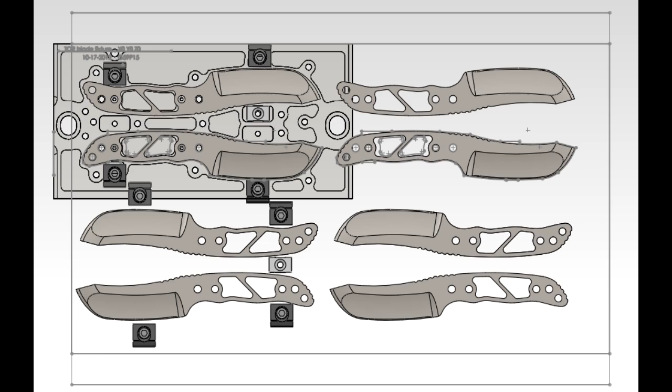The next probably week or two, I'm working on our fixed blade knife called the Tor. I'm making about 20 of these, the handles are already finished, I'm working on the blades next. I'm designing a big fixture right now so that I can make 8 blades at a time in one setup, that just makes the machine time go a lot more efficiently. But I've already shown how I made the Tor in several videos, so I'm not going to bore you guys with too many continuation videos of just doing the same thing over and over again.

Same thing goes for the Norseman, my folding knife. I'm getting ready to do a batch of 50 of these coming up soon, and directly after I finish with the Tor, it's going to be all about the Norseman. For that batch, I'll film some of it, but I'm not going to film everything like I was doing before, because I feel like it'll be repeating what I've shown in previous videos, and I don't want to do that. I want to show you guys new stuff, what I'm working on that's weird and exciting and interesting, not just the same thing over and over again. It gets a little boring.

With the Norseman, I have quite a few redesigns that I want to do. There's a bunch of little things - it's going to look the same, but it's going to work even better. All you guys who own one know how important those words are, because the first batch was good, the second batch was amazing, the third batch is going to be nuts. I've got a few little changes to tweak and redesign. I want to create my own bearing system, very similar to what I use now with the blue caged bearings, except I'm going to machine the plastic carrier myself, which will let me use smaller diameter ball bearings. That particular size isn't available right now.

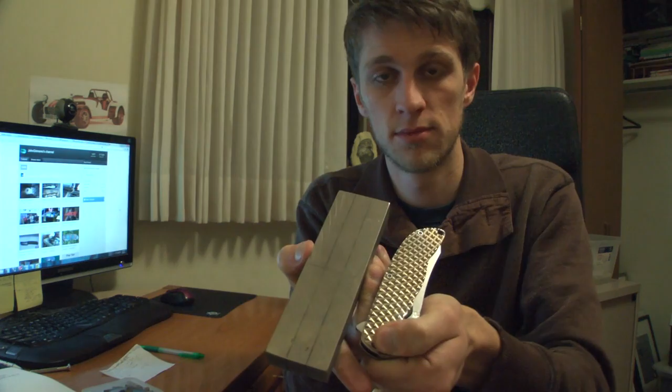Imagine making this knife out of a solid piece, where you mill out a contour where the blade goes. Now, what a lot of people do when they make an integral - and I mean, not a lot of people make an integral, but this is what people do anyway.

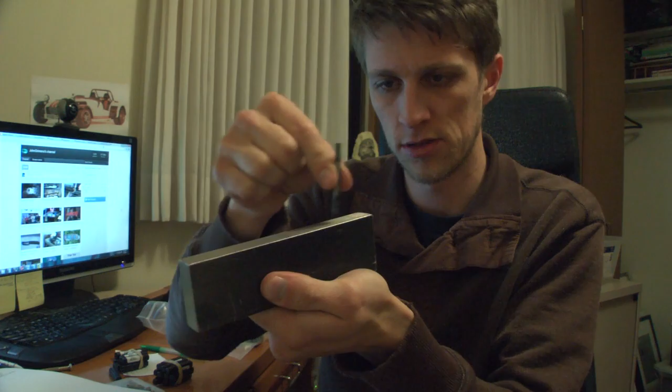The people that are foolish enough to take on this task, if this is the handle, they'll mount it upright in a vise like this. So they'll take an end mill like this. This is a 5/32 end mill. They might use something slightly smaller than this. Mount it up like this and just do passes down, down, down, down, down.

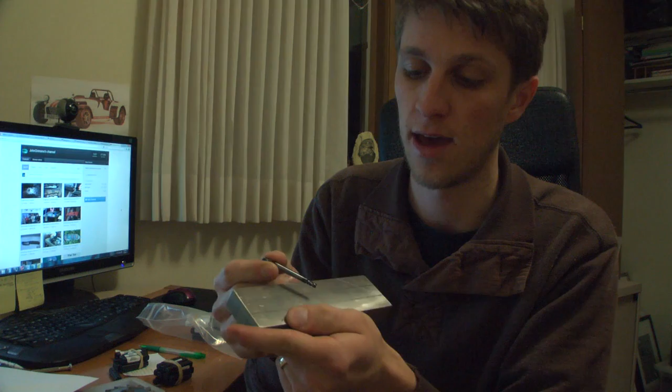But you got to think, you've got a blade that's almost an inch tall, so you have to mill down an inch deep using such a small diameter end mill. That's a lot of deflection, a lot of depth for this end mill, for it to go down that far. That's a lot of work for this little end mill, and a lot of guys have problems with that. When the end mill's sticking out this far, it deflects a lot, it chatters, and it just generally sucks, and it takes forever. My buddy Brad Southard says he spends 8 hours doing this manually on his manual milling machine. That's devotion for you right there.

So the better way to do it, the quicker, more efficient way, is to use what's called a slitting saw. Now this bad boy I had custom made for me by LakeshoreCarbide.com. It's a 3-inch diameter cutting wheel, slitting saw. The inserts, carbide inserts, are 5/32 inch wide, and it does both end cutting and side cutting.

So instead of mounting the block like this, I'll mount it like this in vice jaws or something similar, and then I'll go in from the side with this tool, and I'll create a trough, basically a slot. And I'll do it in multiple passes, but it'll go much quicker and much more efficient. If I had a big, fancy, expensive, rigid machine, I could do it in one pass. And I know a guy that does that on a big, fancy, expensive machine, and he says it takes 14 seconds. Boom. Versus Brad's 8 hours to do it manually. Now, I'd be happy if it took 10 minutes of doing light passes. I don't care.

Yeah, this thing's going to be really, really cool. Lakeshore sells these in standard sizes, but not in the 5/32 width that I requested, so he was kind enough to make that for me, and the price was reasonable.

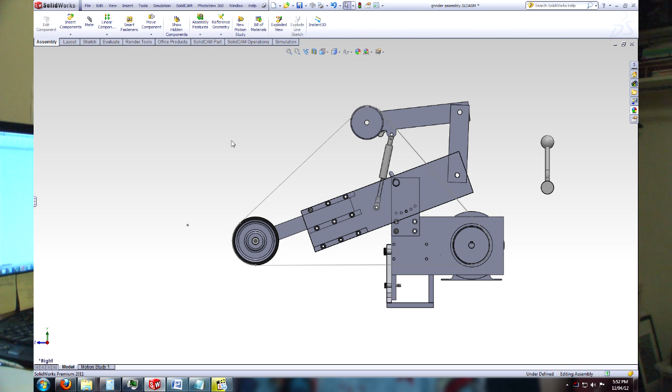So over the past week or so, I've been designing my own grinder. So here it is. It's basically a mesh between Brian Fellhoelter's Uber grinder and Mick Strider's Sofa King grinder, whatever he calls it, and a bunch of other pictures that I found online.

And it uses the 1 horsepower motor that I currently have for my disc sander, because I think once we have this, I won't use my disc sander very much, or I can always figure out a way to rig up the disc onto this apparatus.

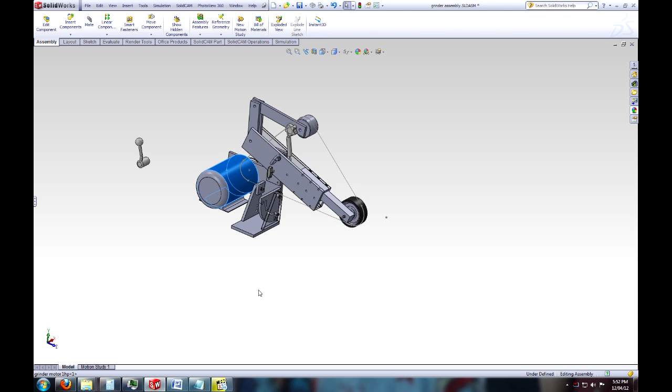But yeah, so it's something I'm really, really excited to build. I've been wanting to build one for a long time. And I just ordered all the wheels and pulleys and abrasive belts that I need from USA Knife Maker. This design is really cool. It's got a tilt bracket here, so you can go from a horizontal to a vertical grinder in one easy step. I got that idea from Brian Fellhoelter.

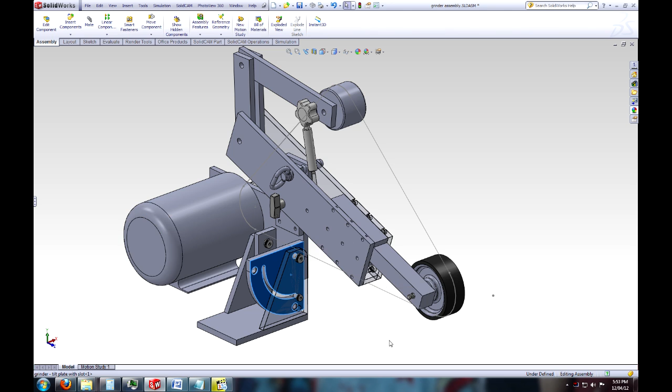Everything else is pretty basic. This goes in and out to adjust tension. It's got a gas spring here to adjust the belt tension up and down. This whole thing articulates, so you can adjust it, and it's got an adjustable work height.

All these pins here - you pull out this pin, and the whole thing can tilt up or down, depending on if I mount it on a table or if I want to grind high or grind low. I don't know, I've never used a grinder, so I'm sort of building everything into it that I've seen other people use, and hopefully it'll work exactly what I need it to do.

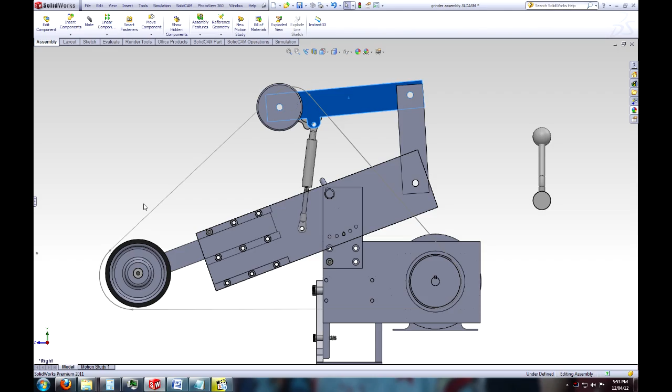Now, this is not to say that we're going to be hand grinding blades exclusively from now on, but we'll certainly start playing with that and see where it takes us.

With the Tor, it's a hollow ground bevel here, and I designed the hollow angle to be on a 10-inch diameter, like a 5-inch radius, so that if I have a 10-inch contact wheel, I can just go bzzz, and it'll get rid of all the milling marks if I so choose.

I like the milling marks. I think it embraces the awesomeness of CNC, and that's kind of what I'm all about. So as a general rule, I think I'm going to keep them because I think they're awesome. But you know, it's fun to play with tools and try different things. There's about a bazillion options of ways to do everything.

So anyways, guys, that's about it for Sick Knife Making Tuesday. Not the good kind of sick either. This sucks.